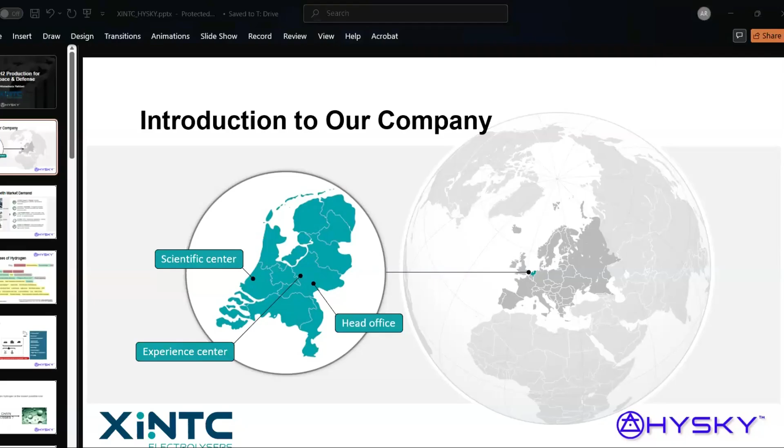Perfect. Yes. So our company is XINTC. We are a Dutch original equipment manufacturer of modular alkaline electrolyzers. We are in Europe, as located on the map. We're a tiny country, but the Netherlands is a very highly innovative country. Following up on that, XINTC has developed a disruptive technology for a modular, scalable alkaline process.

So we have 3 locations in the Netherlands. Our scientific center, from which I am joining the talk, is in Delft. You may have heard of the university in Delft, TU Delft. So we are very close there. I've also done my PhD there. So there are some good connections between the knowledge institutes and us.

We have an experience center where our hydrogen system is currently operating, in the middle of the Netherlands, outside of Barneveld, and our head office is closer to the German border. So the Netherlands is small. Going from one side to the other may take about 2-3 hours. So it's not that far compared to locations in the US.

So looking at the market, before jumping into the electrolysis, I want to put a little bit of perspective on how XINTC sees the market. Basically, we arbitrarily divide the market into 3 segments. We look at the residential market and the large industry. For large industry, you can think of the steam methane reforming market, high volumes of hydrogen or natural gas needed. You're talking about constant loads for producing really at gigawatt scale. The residential market we see as individual households, maybe 150 kilowatts, 200 kilowatts maximum. And whatever is in between is for us the middle market.

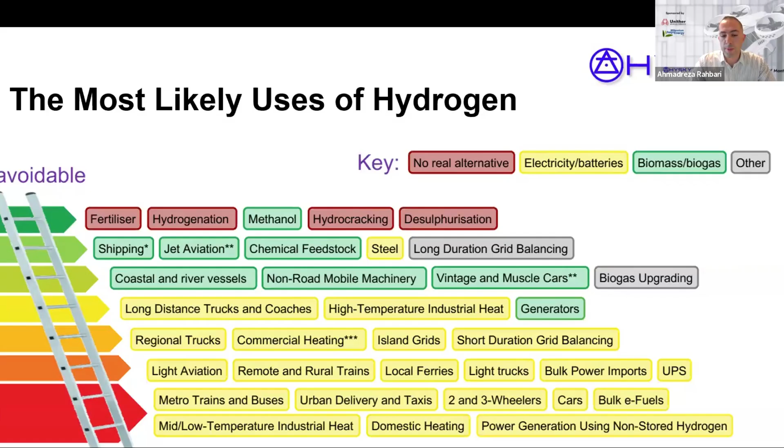So for us, for XINTC, we generate hydrogen from our systems for any application, for any location in the world. I will do a deeper dive into that. For us, the application doesn't matter because we have certain modular components in our system with which we can adjust the quality of hydrogen and the pressure of hydrogen to that specific application. And that's the useful thing about having a modular system.

we have a reduction of water on one side, and then there are ions and charges forming, and these charges are swimming to the other electrode, and at the other electrode, the oxygen molecule is formed. So the performance of the system really relies on how this cell is made. If these electrodes are really far away, these ions have to swim really far distances.

That means electrical resistance, and that affects the performance of the electrolyzer and of the system. So there are lots of design considerations. There's also conductivity of water. You don't use pure water, of course, for alkaline. You typically use a solution of potassium hydroxide to help with the conductivity of the system, and what kind of distance you have.

These are all kinds of design questions and design considerations that we have as a company, and other electrolyzer manufacturers as well. They need to think about this together with the application to come up with a system that works well. So we are heavily focusing on wind and solar integration for alkaline. And that's the disruptive part of our technology, because classical alkaline on the market is mostly designed for constant loads, doesn't really like on and off cycles, large stacks.

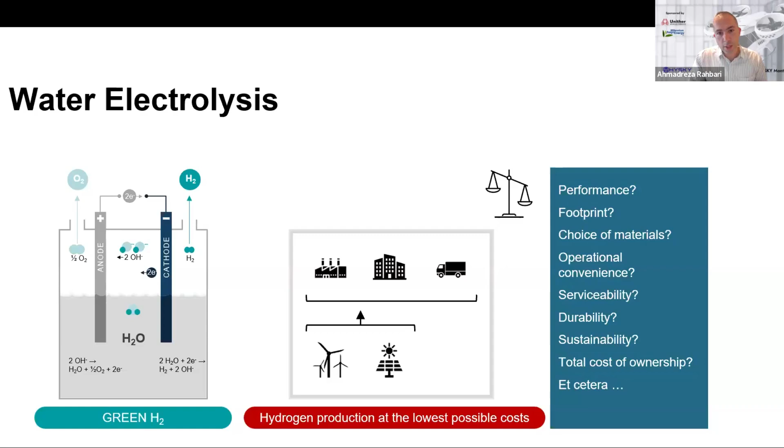We have this specific technology. We have a different variation of alkaline that allows us to follow the profile of wind and solar energy. So that means we have to consider performance, and the choice of materials is very important for us. It has to be a durable and sustainable system. So we have made fundamental design choices for that, and I will be going into these fundamental design choices as we move forward.

So basically our mission is to generate hydrogen at the lowest possible cost price. This is key for us. Interacting with the market, there are different perceptions, maybe from a more conventional point of view. There are discussions about capex and opex, which are of course relevant, or there are purely discussions about efficiency of the electrolyzer.

At the end, what we see for bankability and for projects becoming a realization, you need to look at the cost price of hydrogen, how much per kilogram of hydrogen you can generate, in dollars or euros. So dollars per kilogram or euros per kilogram of hydrogen is the decisive factor for the financing, because you can map your financials, the money streams, the costs, revenues.

And for XINTC, the goal is not to make the most advanced or the highest efficiency system. It's entangled with a lot of design choices to keep certain critical materials out of our system because of scarcity, geopolitical limitations or value chain limitations. Keeping everything in balance, we want to come up with a system that generates hydrogen at the lowest possible cost.

That also means that how we connect to the renewables matters. The fewer intermediates you have between your energy source and the electrolyzer, the fewer losses you have. An example is having electronics between your solar field and your electrolyzer for decentralized solutions. We have eliminated that, so we can have a direct route from a DC source like solar to our electrolyzer. We will discuss that more.

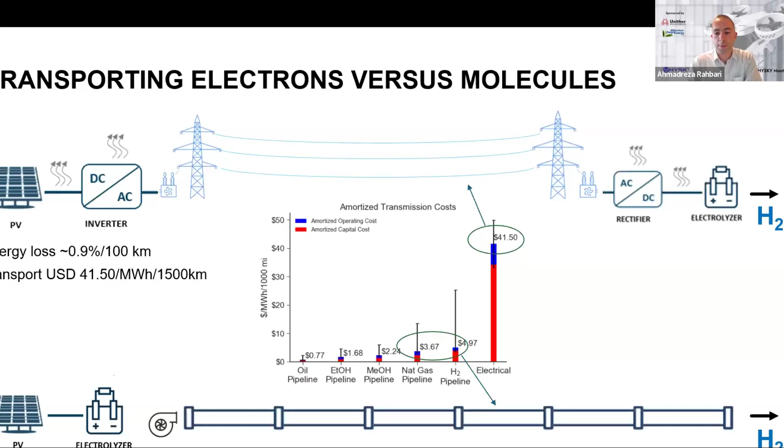So if you can have a system that is durable and you can connect your electrolyzers to that, you can put these systems down in many locations, generate cheap hydrogen, either use it at location or transport it. So this gets coupled with reduction in levelized cost of electricity from solar energy, and similar goes with wind. But as I mentioned, we have a specific technology that is highly suitable for solar coupling to electrolysis.

So to dive a little bit deeper on that, I'm showing here two different architectures that are typical of coupling an electrolyzer to a DC source, that is photovoltaic, PV. So either it goes via a microgrid, so you need to use an inverter step, a transformer stepping up voltage, again stepping it down, use a rectifier step to bring all these electrons that you produce at the solar panel to the electrolyzer. So all of these steps have losses, they have capital costs, they have maintenance. So we estimate if you go the microgrid route, there are losses around maybe 9 to 10%.

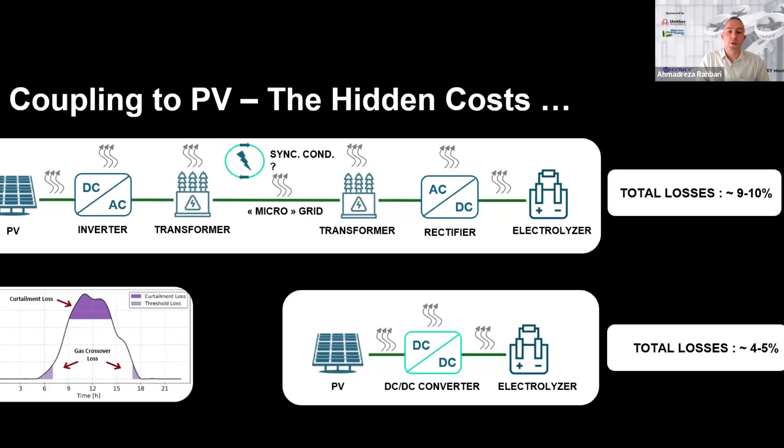So you have both a curtailment loss and gas crossover losses, which we call threshold losses for large stacks. So with our design, we are tackling these losses. That means we want to get all of the electrons from the system as much as possible. So that brings us to our architecture. We have moved from a large stack configuration, you can think of a stack of megawatts, or even stacks of 5 megawatts or larger, to modularized building blocks. These are still stacks, but we call them modules to make the distinction between the architectures.

And this also offers a significant turndown ratio. For typical alkaline systems, the numbers in literature vary from 10% to 30%, but I think for realistic market values, below 30, 20% partial load, it's not possible to run it safely. And incidents also point to even partial loads as high as 50%. In our system, if you have 1.2 megawatts of electrolysis capacity, every one of those single pairs of modules is around 10 kilowatts. So we can have a turndown ratio of 120 to 1, meaning that we can operate the system still at 0.8% of capacity, while a single set of modules still operates at nominal conditions.

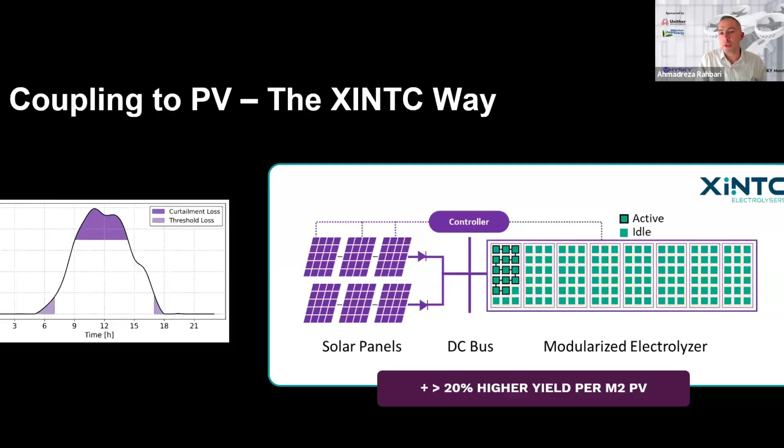So even though the partial load is very low, the individual building blocks and the individual units that are running the system, they are still operating. The stack doesn't see partial load, that individual stack. So with this, we can modulate throughout the day. We can turn on and off these systems as many times as we want, almost. And this is kind of the distinction. We calculated this to be a 20% higher yield per square meter of photovoltaic area.

So just to summarize the previous point, this offers a real-time tracking of renewable power. And on the right-hand side, you see our gas modules. This is a schematic, of course, but with the changes in solar irradiance throughout the day, we can regulate and modulate these individually. So that means the system's capacity can also move up and down with the fluctuations of the solar profile throughout the day. The system doesn't suffer from partial load losses, and the direct coupling reduces the need for power electronics.

So these are the design choices that we have made because we are really focusing on decentralized systems. Of course, you can also connect the electrolyzers in a centralized location with a constant load with grid connection. However, the strength of our system is really in direct coupling with such renewable sources.

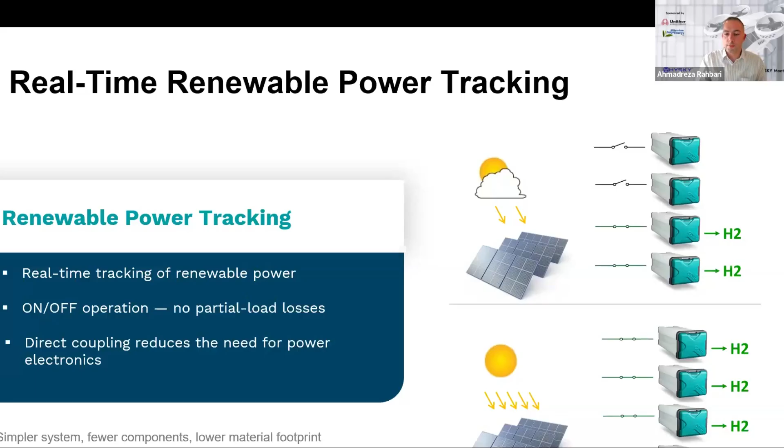So there's one thing that is very important. The devices, the electronics in the market, they are designed to regulate the power for a specific solar field to match the maximum power point, and it's called maximum power point tracking. We have measured and we have shown within our R&D program that actually the maximum power point of your solar field doesn't necessarily mean the most efficient point for hydrogen production, because at lower voltages, we see here, we can gain conversion efficiency for electrolysis, but the power will be lower.

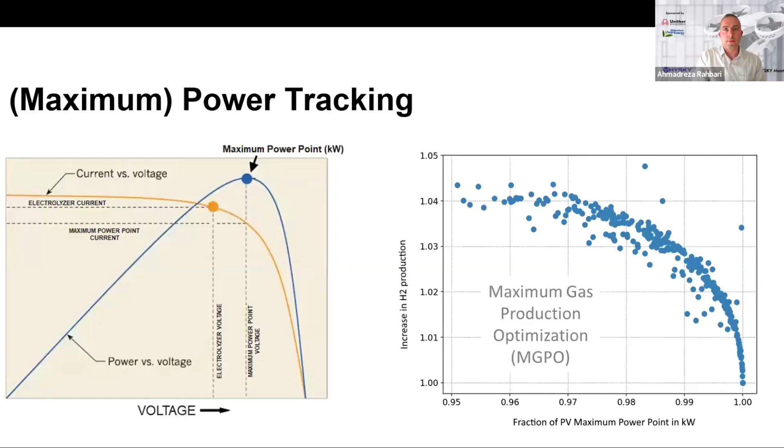So we can even regulate that with our control system, adjusting it to not exactly match the maximum power point, but to be at a slightly different voltage. So we can gain improved hydrogen production efficiency. So these are all doable because we have these printed circuit boards that allow us to regulate each electrolyzer stack individually. So I've discussed a lot in the beginning, and this was kind of an introduction. I want to dive a little bit deeper into the stack and our disruptive technology.

So first of all, we are using alkaline technology. And as you may know, alkaline doesn't operate in an acidic environment, so the pH is quite high. So that allows us to use transition metals like nickel and iron. These are typical electrode materials for alkaline technology. And the advantage is that we are not required to use platinum group metals and PFAS. And this is also, of course, valid for conventional alkaline systems.

But we generate hydrogen for now at atmospheric conditions. So that means we have a simplified balance of plant. The CapEx and OpEx for atmospheric hydrogen production is more cost competitive for us. And we have a robust control strategy, as I mentioned, for solar coupling. And our system is very easy to parallelize for the modules. And we have an atmospheric hydrogen buffer. This is for either bridging day and night production or as a buffer step for compression, which I will also explain shortly.

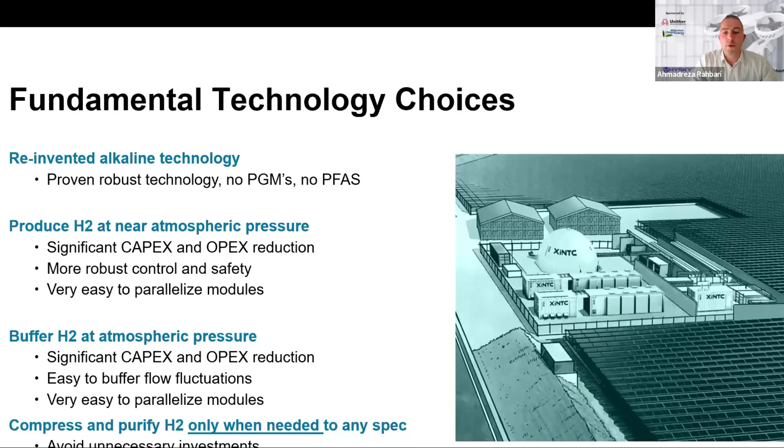And the advantage is the hydrogen is produced atmospheric. For some applications like industrial warming, mixing with natural gas, you don't need to have a complex balance of plant. But for cases where you need ultra pure hydrogen or pressurized hydrogen, we offer a separate module that realizes the post processing part. So with that, we also compartmentalize the costs. If there is a need for atmospheric hydrogen production, local use, then you are not paying overly for a complex balance of plant and pressurized hydrogen.

So since our hydrogen production is atmospheric, it allows us to come up with a completely different design than conventional stacks. So what you see on the right-hand side is our module. We call it gas module. So from now on, I will also try to be consistent calling this gas module. It's made of polymers, except of course for the electrode materials. It's fluid and gas tight.

You can operate it dynamically, and the polymers are recyclable. We don't use any PFAS type membranes or Nafion type membranes. So we use a kind of diaphragm.

Typical electrolyzer stacks are made of cell plates, and between them you have gaskets, and these gaskets are also potential leakage points. Our design is fully made of plastic on the outside. So when the stack is built and operating, there are no gaskets. So between the cell plates, we have eliminated any leakage possibility that happens if a gasket was present, and that you can think of as mechanical stress or degradation. So we have eliminated that.

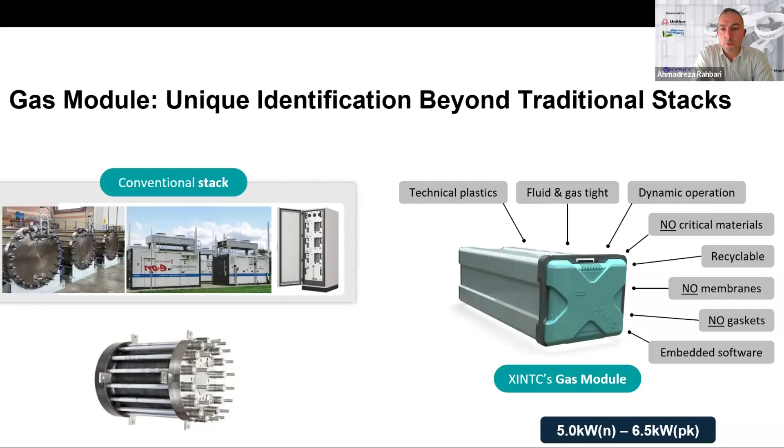Gas modules are nominally 5 kilowatts, and maximally they can go to 6.5, and they work in pairs. On the left-hand side, I think you recognize the conventional stacks, and these are quite large. The gas modules that we have produced, you can hold them as one person. They're around 18 kilograms, so it's still allowed within European regulations so that one person can operate them, change them or install them.

So I have two slides about PEM and anion exchange membranes. I will keep this brief. It's not the core part of the presentation, but maybe mentioning briefly why we are not considering PEM. This is not about comparing the technology, it's simply how XINTC views PEM and anion exchange membranes versus alkaline.

Basically, the issue with PEM technology is that it heavily relies on iridium and platinum. These are expensive metals. Iridium has only 7 tons of mining annually, I think mainly South Africa and Zimbabwe, if I'm not mistaken. And it's a byproduct of platinum mining. And that's already a large bottleneck for logistics.

And it's very expensive. And because the environment of PEM electrolysis is very acidic, you basically cannot use transition metals like nickel and iron, because the system will eat itself from inside when it's generating gas. So it's a matter of lifetime. There's a lot of research going on to reduce the platinum or the iridium loading on the anodic side. But reducing anodic loading also means reducing the lifetime.

So it's a little bit complicated, especially in light of connecting this to renewables, because when you connect this to renewable sources, with these dynamic cycles at different voltages, at low voltages you may get current reversals, or when you shut down the system, there are ions or radicals that are attacking the PFAS membrane or Nafion membrane. You have phenomena like membrane thinning, pinhole formation, gas crossovers at low loads.

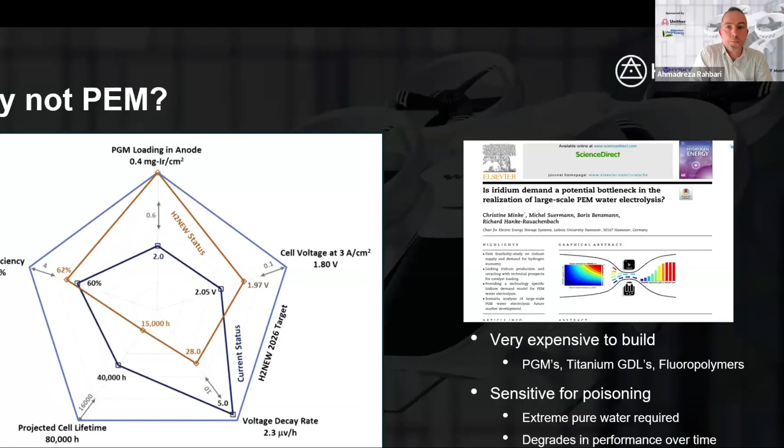In contrast to PEM systems, alkaline allows less pure water to be used as an entry. For PEM and some anion exchange membranes, you need really ultra pure water, which is a design challenge, also how to recirculate that. Similarly, the anion exchange membrane kind of wants to combine the best of both worlds, because it's not an acidic environment like PEM, it's alkaline. That means you can still use transition group metals like nickel and iron, so that's an advantage.

You don't have to rely on platinum group metals, but still the mechanism that allows you to transfer charge across the membrane is hydroxides, and this is also one of the degradation mechanisms that at the right conditions can attack the membrane to thin it or to unzip the membrane. And still, the anion exchange membrane systems that are really state of the art or have the highest performance still use iridium and platinum group metals.

Removing that is possible, but you go back again to a system where the ohmic resistances are really high. So the top AEM systems still rely on platinum group metals. And you can run it with ultra pure water, but still the efficiency is not yet high, or you cannot really push at high current densities. So you still need to use potassium hydroxide inside the system. That leads again to corrosion.

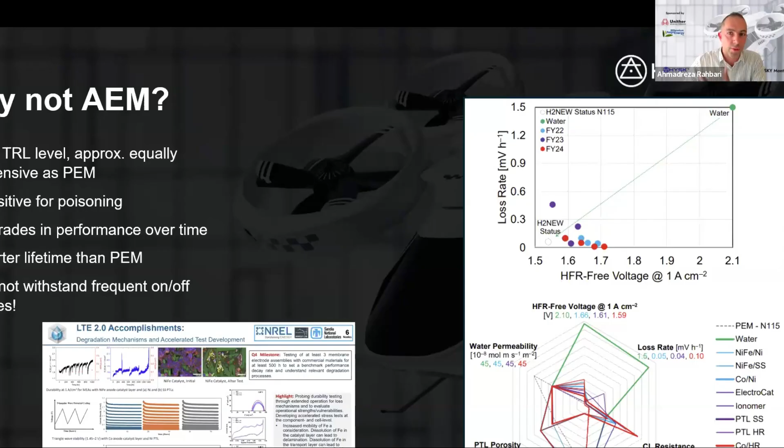So it's a promising technology, but in comparison to PEM and alkaline, the TRL is lower. So we are also looking out for it, but it's not yet the technology that XINTC picks up for now. Going back to alkaline, alkaline has its own limitations, of course, and the limitation is that you run the system at lower current density, because you're moving away from platinum group metals, which are highly active catalysts.

So when you use nickel or iron or stainless steel, these are cheaper, they're massive, and they're always available in the market compared to the scale that we are talking about for hydrogen. But the activity is lower, so that means the current density will be lower. So these are a bit more sluggish and massive systems, but they are more robust in terms of lifetime.

Over 15 years, you can run them, and this is a proven technology. So they are a bit more sluggish in general. They can and they need lower current densities. So for our system, or at least in the Netherlands, we recently had a lot of discussions about circularity, and I thought maybe this is also an interesting addition here to bring to your attention.

For renewable systems, for new products, the principles of circularity are becoming more and more important. So I'm discussing four of them here: refuse, reduce, retain, and recycle. So for refuse, this is not something that we have done in retrospect, in retrofit. We thought about these principles when designing the product. As I mentioned, we are moving away from critical materials like iridium and platinum, and we are not using Nafion-type membranes, sulfonic acid group type membranes, polymers. And we're not using gaskets.

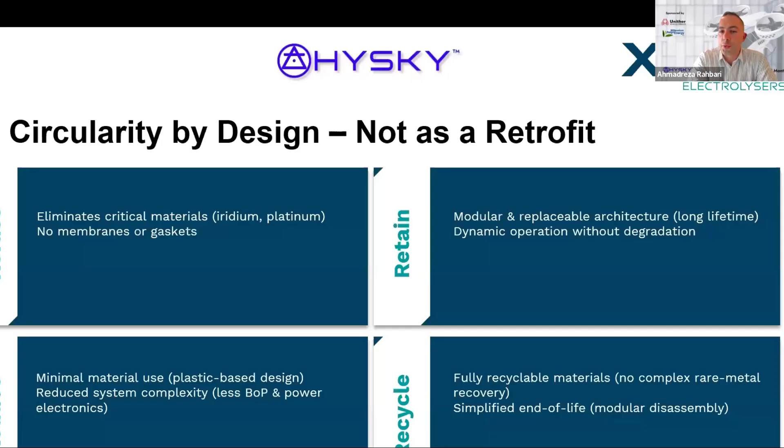So how does the system work? I talked a lot about modularity and that these gas modules work in pairs. These come at the moment in containerized systems. So you can imagine that you are inside a containerized system. There's a corridor, and in front of you, you have three sections you are seeing here. Every section is kind of an independent electrolysis unit.

It has 15 pairs of modules with electronics, liquid circulation and cooling, which is underneath and not visible in the picture, but basically every system here is air cooled. So, fans blowing from below. It goes through a heat exchanger, cools the liquid and goes out at the top. So every building block is standardized. This is basically the same design. These are in blocks of 150 kilowatts, and they are tapping from the same DC bus bar, basically.

So in one container, you can have on one side 4 of these, and on the other side another 4. That makes a total of 8 sections, which is around 1.2 megawatts nominal capacity. And the nice thing is, because of modularity and the independent balance of plant that every one of them has, you can run each module depending on the power available. So if there is, let's say, only 150 kilowatts available, one module will be operating. And if there is up to 300 kilowatts, then you're operating that.

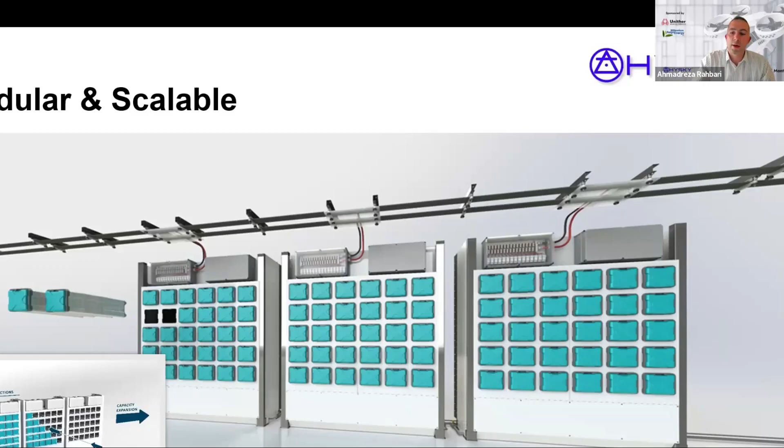It's important to know that even within the modules, every single pair can be operated independently. This kind of modulation allows you to really scale the system up and down within a few seconds. So I'm showing this now from outside. On the right hand side, this is the containerized system, where you saw the gas modules. You see the air filters here for the ventilation system.

On the left hand side, you have the power and control module, where we have the DC connection coming in from solar panels, or if we have an AC connection, we have rectifiers from either wind or an AC source. And by the way, we can mix the power sources, so we can use DC only. We can also complement DC partly with grid power or with wind power. And the nice thing about DC is we can go from 1.2 megawatts to 1.6 megawatts. We can really go higher because there's no power electronics in between. So we can really ramp up production.

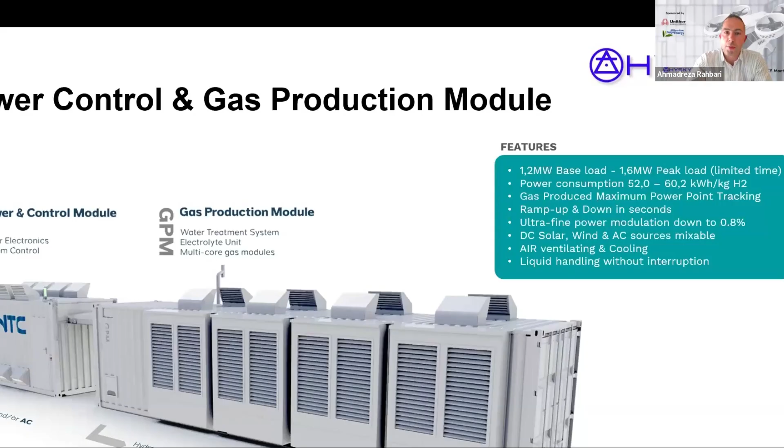And this modularity comes in layers. So if we are now zooming out a little bit. So we started at a cell or a stack. We saw a collection of them. And now inside, you have this helicopter view of these gas modules inside the containerized system. And now we are kind of stacking them to build up capacity. So we have the power and control module, gas production modules, and maybe there are some hydrogen storage modules, either coming in numbers or different sizes, and they can be compressed. So in this way, we can really scale it without really engineering things from the beginning.

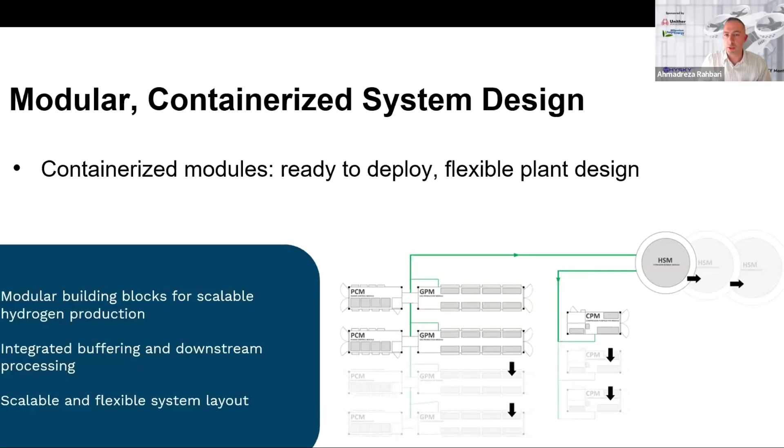So the advantage is that you have a solution for decentralized systems. You can scale this at the speed that you are comfortable with as a business, because adding another module or adding more capacity doesn't mean new engineering and project procurement. It doesn't require it, because everything is standardized, like adding Lego blocks.

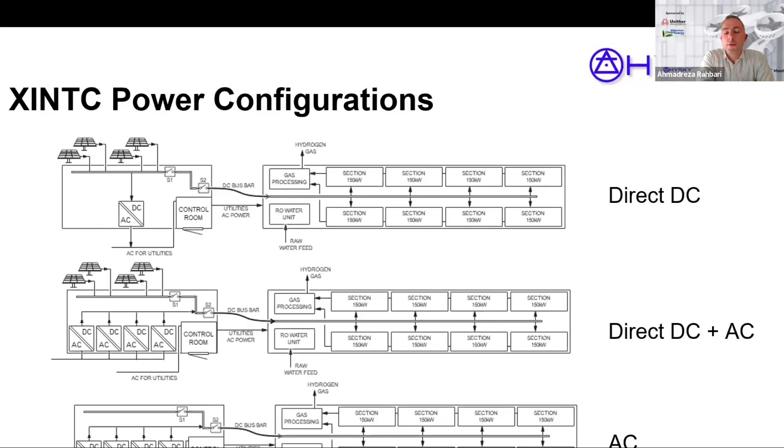So the architectures, the power configurations, as I mentioned, we have direct DC between the sections, so to really directly couple them from solar panels. We can combine them depending on the source. The AC can be either wind power, which is also fluctuating, or it can be the grid. The way we regulate the system is a little bit different, but basically we can mix the energy sources, or we can also go directly for AC. So for our system, we have a maximum of 4 rectifiers in the power and control module, and we regulate the voltage for that, so we can control our production.

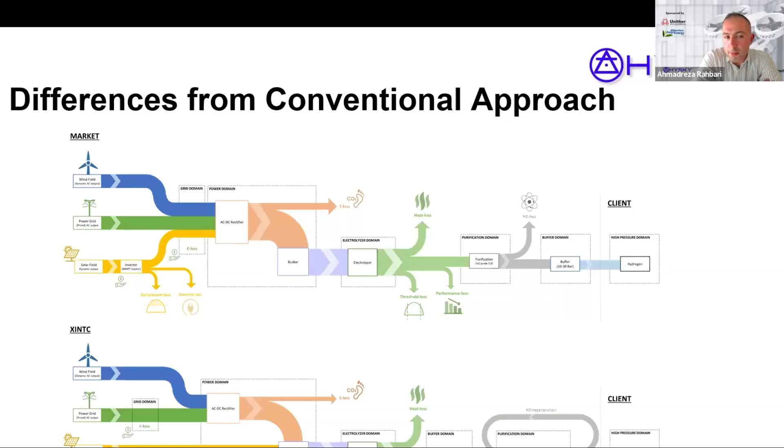Going a little bit higher view, how our system operates compared to the conventional market is that you have all these energy sources coming to the power domain. You have the AC/DC step, and then this comes to the bus bar, and then it enters the electrolyzer. And the losses here are large because there are lots of conversion steps. Our idea is, for solar, we can directly couple to the bus bar. So on the lower side, you see direct connection from solar energy to the electrolyzer, and for wind and AC sources, we need rectifier steps to go from alternating current to direct.

And what is very important, but maybe a little bit outside of the scope of the presentation, is that we carefully look at the business cases for different clients and different projects. So I want to show how we look at the system and energy sources dynamically, and how we look at the energy management system, because depending on the profile of the electrolyzer and the size of the solar, wind, and grid, we can offer customers different configurations, and the optimum electrolyzer size depending on their available power. So in this example, we have an electrolyzer of 4.8 megawatts, and let's say the customer has a 5 megawatt solar field, and there's available 2.4 megawatt wind and grid connection. How can the electrolyzer handle that?

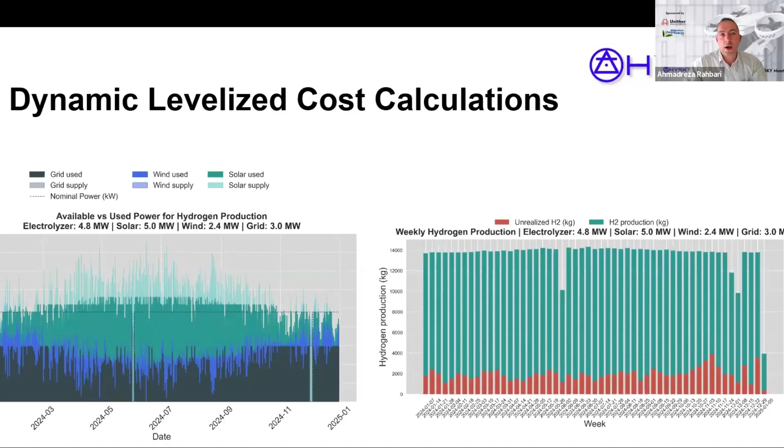So the electrolyzer can mix that. It can prioritize solar energy when the solar is available. That's how our system works. It can really go above nominal capacity when an abundance of solar energy is available. When there's not, it can fall back to wind. And if there's no wind energy available, it can fall back to grid. So it can kind of prioritize and has a system behind it. So we can nicely calculate hydrogen production based on the power profile. And we can also see based on this profile how much is still unrealized hydrogen potential. Then you start turning the knobs and see, okay, which configuration works best for me. And this leads to a levelized hydrogen cost. And we can kind of see that at modular level.

So in this example that is shown, you have 4 modules, 4 containerized systems, and we can see the first one, and you can choose how you want to operate this. So this is the energy management system and the control choices. This is just one example where it goes kind of partially sequentially. So you see the first one is operating even above nominal load for the solar energy because we allow it, and the last one is becoming less and less active.

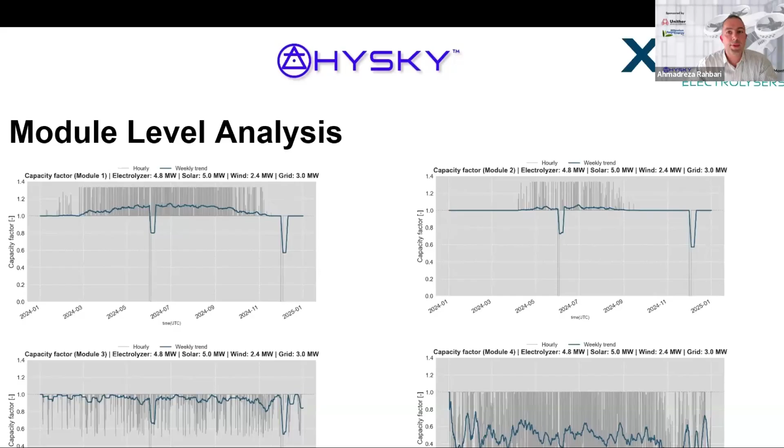So you see, if you add more containers, what happens? If you add more electrolysis, you are utilizing less and less. These kinds of insights are really important for customers to know, and for any business case. As I mentioned, this kind of analysis, based on the dynamic nature of our system, really helps us to help the customer see what configuration works best for them and what kind of cost price for hydrogen they can expect. And this is really the decisive factor, the hydrogen cost price.

And I want to just wrap up with this figure. Our hydrogen hub is in the Netherlands, in Eerbeek. I'm not sure if there are any visitors during the World Hydrogen Summit in Rotterdam. If there are, please contact us. We are organizing visits to our hydrogen hub, so we'll be happy to have you. And for other occasions, we are also regularly receiving customers, so we are open to any people who are interested in visiting us here.

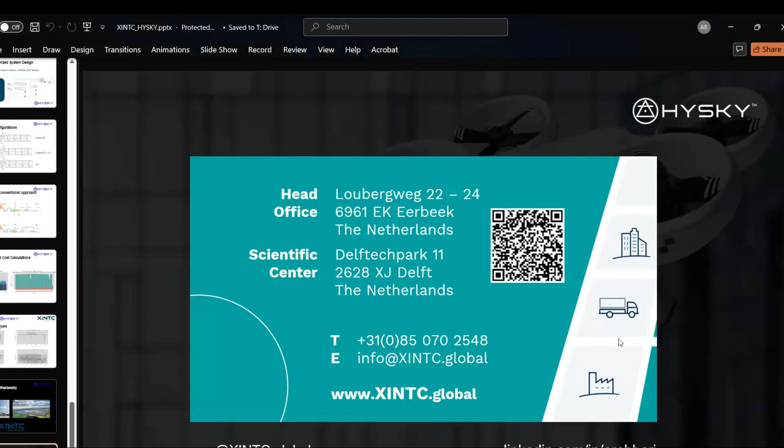Okay. And I think, Danielle, I am on my phone at the moment. Is it possible to ask you to share your screen with Flying High just this one time? Of course. Which one am I sharing? Just the spreadsheet that we've been using? Yes. Okay. I hope I pull up the right one. You'll have to tell me which. Sorry for putting you on the spot like this. No, it's fine. I'm not sure that we want to; I think there's a lot of personal info in it. Actually, I think just our graphic that we have for Flying High would be sufficient. Yes, of course. I can do that.

While I'm pulling that up, Rich, if you're still with us, please come on and make your announcements. Apologies, I didn't see you were trying to until after I launched the webinar. Rich King, are you still with us? He is here. Rich, hi. How are you? Good to hear your voice. Great, and how are you? Pretty cool. I didn't make any announcement. Oh, I'm sorry. Somebody in the chat said their mic wasn't working; I thought it was you. Okay, I'll make an announcement for you. I thought that was a superb presentation.

And I agree. The other thing I would say to you is on the politics side of it, we at SAE cannot do what you were requesting because it would be in contradiction of our policy. Well, you guys are a 501c3, right? Yeah, exactly. So is HYSKY. Even more reason why you should take the course, because the very first lesson covers the difference between advocacy and lobbying, and that 501c3s are allowed to advocate and lobby. They're allowed to lobby as long as it is 15% or less of their total activities. And I would almost bet you that SAE already participates in lobbying, and I could dig into that. But even more reason why you should take the course or join the cohort. So I'm happy to follow up more.

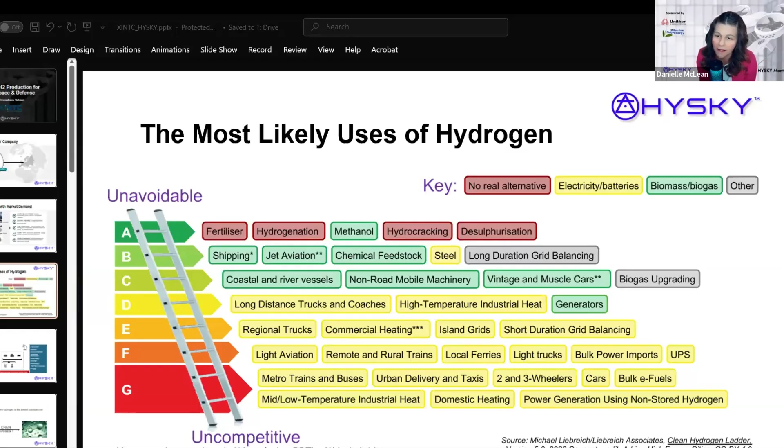Are you sharing something else? It's not on the slide. I was maybe going a little bit fast, but it didn't move. I wonder if sometimes it does that. Maybe you need to stop share and reshare because it's just stuck. Okay, the slide still. Yeah, I don't know. Zoom's been a bit buggy. Let me try again. Okay.

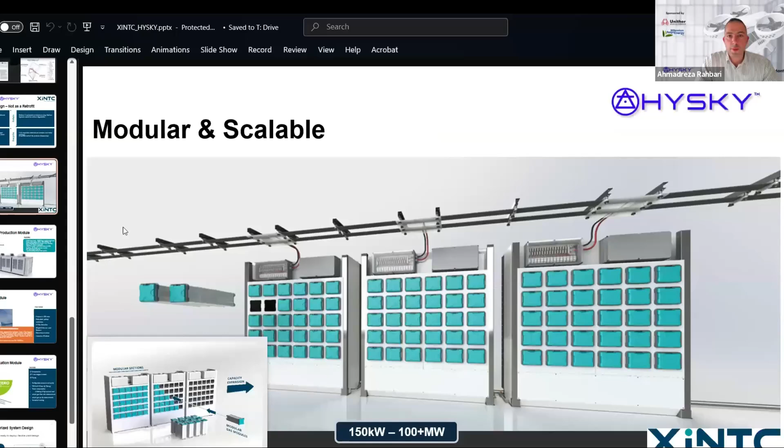Are you talking about this slide maybe? Yeah. Okay. So it was this one and the next one. What are the dimensions of these in feet, if possible?

Thank you. During the presentation, I realized I'm using a lot of SI units and I didn't have the correct conversions in feet. No, I should know them. I know them, I just didn't catch them. If you did say it, I didn't catch them, but my American brain would be happy to have them in feet. But I do understand SI. I was just multitasking. So you did great.

Basically these are 40-foot high cube containers on the right hand side where the gas modules are, and the left hand side is 20-foot high cube containers, in terms of length, 40 feet and 20 feet. And then you mentioned gas a couple times, and I go back and watch these because I can't absorb all of it when I'm also multitasking. But you're producing gas, but are you also just storing gas?

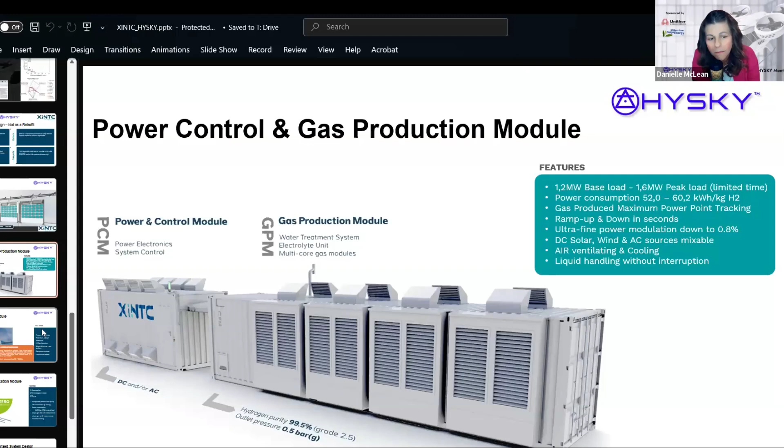So every module has its own function. The power and control module is for directing the electrons to the right place, which is the electrolysis of the gas production module. If your application is atmospheric hydrogen use, that's basically the battery limit, because you can tap directly from this container and use it. But if your system needs a buffer because you need certain volume to operate, you can have atmospheric storage.

And this is a 3-layer double-sided PVC coated polyester membrane specifically designed for storing hydrogen. So one option is temporary short-term storage for your hydrogen and then use it. But the primary function of this is to provide a stable input for the compressor that comes after it. So it's a buffering step for the compressor. I see. Yeah.

How much can you store in that? How big is that? I think you say the different sizes, but how much do you store, like how many kilograms per unit volume? So this is a very good question. The one that you see in the figure is around 400 cubic meters. In terms of kilograms, I think that is around 30 to 34 kilograms of hydrogen.

Currently this is one system that we have, but we can manufacture this up to 10,000 cubic meters. So it can be way larger. Or depending on the field configuration, we can place multiple of these units. It really comes down to the project, the landscape, how you can configure things, because these are really like Lego blocks. You can place them, but you need to know the sizes and calculate the distances. But it goes up to 10,000 cubic meters in volume.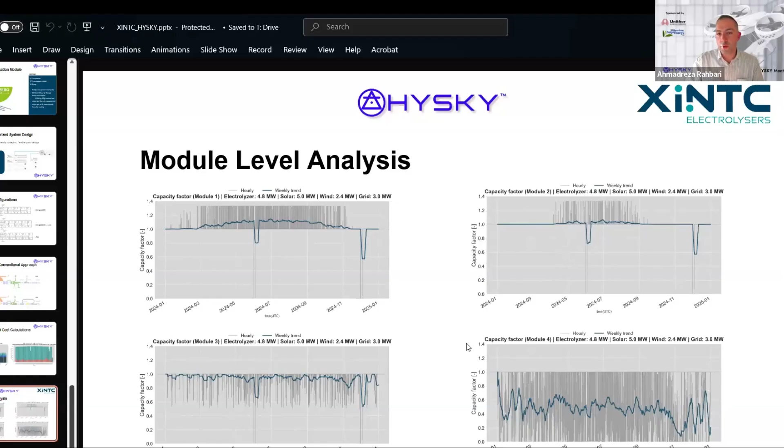And this is a dynamic simulation. So we look at hourly values and we sum them up. So this is a weekly overview of your entire year. You can represent it different ways, but this gives people an idea: okay, if I run my electrolyzer with this profile, what is my expected production every week and how much I'm still missing. And the weeks that are dropped here, these are maintenance weeks. So we can plan everything. These are very customer specific, but we can really plan all of the specifics of the project to give a very good advice on what they can expect from the system.

So thank you. So let me turn to a practical use case now. What kind of investigation have you done in terms of supporting the average vertiport? Have you actually looked at practical use cases of a vertiport or a regional airport, and how many aircraft and operations you can support on the average day? Yeah, actually, we have looked at one interesting application for e-SAF, sustainable aviation fuels. I'm trying to see what I can share here.